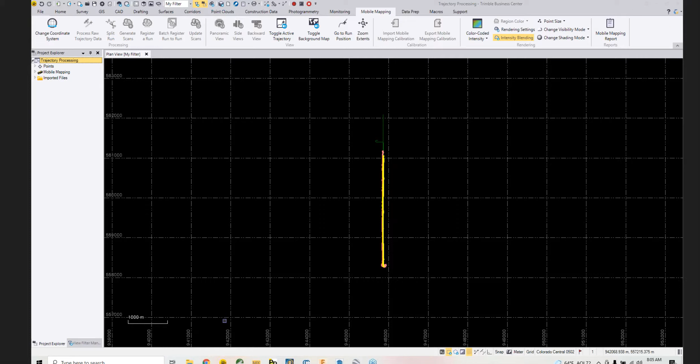So what you can see right here on my screen is just a standard plan view with my mobile mapping trajectory and my 2 runs highlighted. If any of you have used any Trimble mobile systems before, you know the MXDB is all I did. So at this point, all I've done is just drag this MXDB in and drop it there.

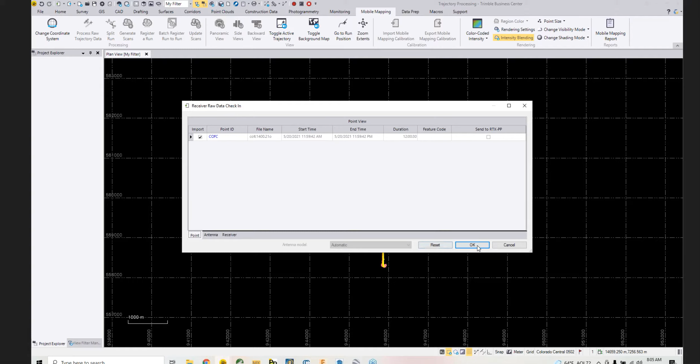The next step that we're going to do to highlight the new trajectory processing that's in TBC is bring in my base station. So I'm just going to bring in a base station, and you'll see the same screen that you would normally see when you have a base station in TBC. So let me turn on the background map. You can kind of see we're in Colorado.

This is during some of the testing pre-release of the MX50. I have a base station up here in Fort Collins, and then our collection was down here in Longmont. A little backstory on why I have a base station so far away is that was one part of the test that I was doing at the time.

And two, we had a couple CORS stations that were closer by, but they were actually recording at lower rates for the time period that we needed. One was, I think, at a 5-second rate, and one was at a 30-second rate, where COFC up here in Fort Collins was recording at a 1-second rate. It also included GPS, Galileo, GLONASS, and I think Beidou.

So it is a longer baseline than we would generally recommend for a mobile mapping job, but the bases that had a shorter baseline would be more detrimental by having those slower update rates. So short baselines are important, but 1-second update rates are more important. So that's why we use this base.

Knowing that these bases weren't recording ahead of time, if I did my due diligence, I probably should have set up a local base, but this was just kind of, we're mostly looking at horizontal accuracy on this one. GIS level accuracies were our goal. There's no control targets, so we didn't worry about it too much.

So you can see here's my mobile mapping run down here, and then our base station up here. All I did was drop them in, and then I'll move into the next step. We're always going to take this left to right workflow that I've kind of harped on, and if I've had demos with any of you, you've probably heard me say it before.

So while that's going for a few minutes, I'm going to just open this next project up. This is the same project - it's just been generated, so let me move over here.

So what I did after that was it automatically changes your primary trajectory to your SBET that you just generated. And then all I've done is generate scans. I wanted to open that up and discuss that for a second while we're waiting for the QC plots.

Generate scans is the same as you've seen with the MX9 if you're familiar with that system. Hit next - I wanted to stop and talk about filters for a second because we do have some different options for filters. We have fewer options under the advanced filtering settings, but we've spent quite a bit of time on the presets, so I wanted to discuss the 2 different presets.

The default preset uses the firmware flags that are filtered on the actual system during collection - things like high amplitude, isolated points, and points outside of its range.

All those are flagged during the collection. The default filter uses what flags the system did and then removes those on processing. So it adds zero time to the processing to use the default filters versus not filtering at all. It doesn't take any significant amount of time, and it takes care of the majority of situations, is kind of how I describe it. It works pretty good.

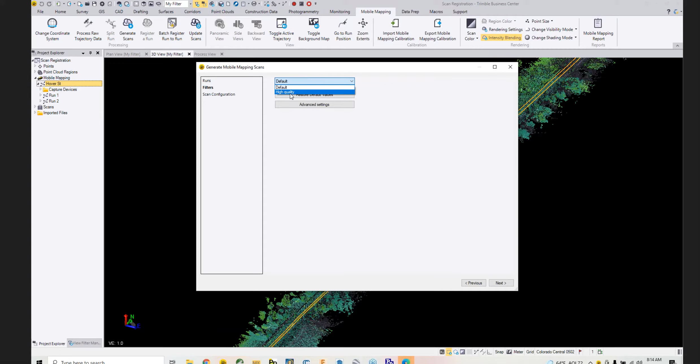So it's kind of a trade-off that we wanted to allow the user to select between where, hey, I don't mind if there's a little bit of noise or a handful of points removed that shouldn't have been. I just want to get my points ready. If you process in default, you should be able to generate scans in about half the collection time or a little bit more than that. So an hour collection is usually 30 to 40 minutes to process. High quality filtering will add some time to that if you have the time, but will give you a closer to finalized point cloud when you're done with it.

Then here, scan configuration is the same as any of the other mobile systems. You select your trajectory and can colorize and generate your masks here. We did do some improvements on the colorization accuracy for the MX50, which I'll discuss when I show the colorized point cloud.

I'm gonna open up the QC plot. I don't know if you guys saw the little notification, the GNSS processing finished while I was talking, and it generated the QC plots here, which if you're familiar with POSPac, you'll recognize that this is the same screen from POSPac. We took a poll of different people at Trimble and some customers. Everybody seemed to like the layout of these display plots that POSPac did. So we thought if it's not broke, we don't want to try to fix it. We're just going to move that over and allow you to use the same plots that everybody's familiar with.

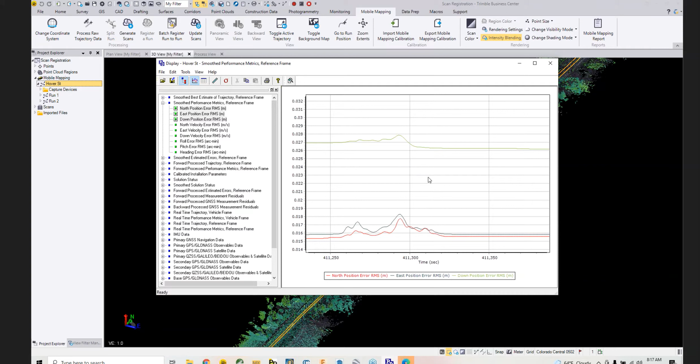One other little tip that I like to show is if you go to view, plot markers, in either event 1 or event 2, those will turn on markers at the camera trigger locations of the system. If I open that back up, you can see all these markers that show where you were actually collecting data. So you can focus on just the area of interest. You can see I drove for quite a while after, and you can see these spikes over here. If I had these spikes and I was worried about them, I could know that they're not important because they're not part of my actual collected run, as you can see over here.

And you have the same exact options. So if there's any other plots that you guys generally are looking at, you can check out your solution status, calibrated installation parameters for your DMI and GAMS lever arms, all those. There's a ton of plots in here that you can look at, and they're all the same as if you had processed in POSPAC instead of processing in TBC.

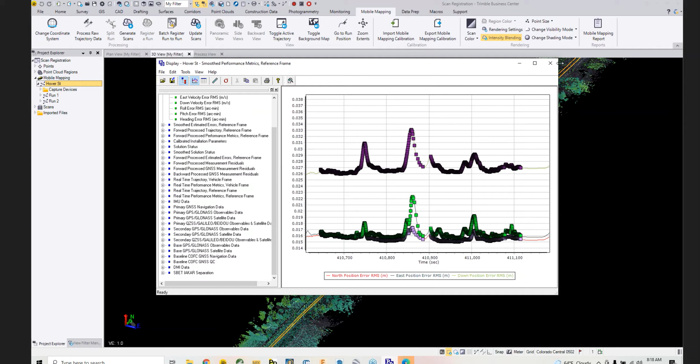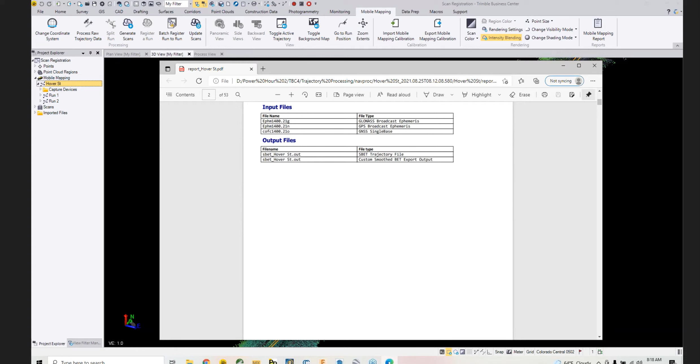Close that real quick. And then we also just at the same point generate the QC report in PDF format. So you can see, you have our ephemeris downloads, just a good summary of pretty much all. It has all the plots. Some people attach this to projects.

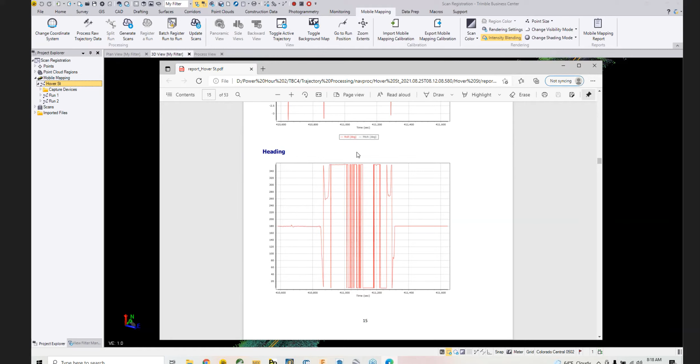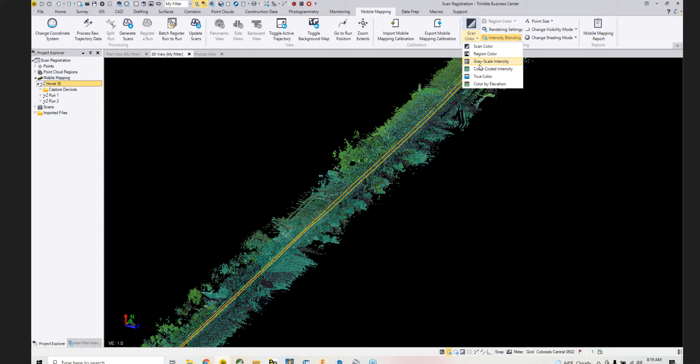Okay, so now that we talked about the trajectory processing QC, I'll kind of go back to the scan generation and this project that we're looking at here. So all I did on this one was a default filter with the firmware flags. It was just the regular SBET. It hasn't been registered or anything like that. Let's go to color coded so everybody can see.

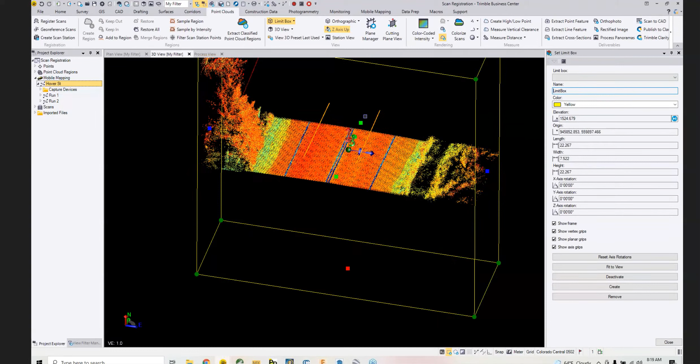And I wanted to kind of zoom in on a couple areas and just show you that there is separation, because the next step is to match these runs together. So let me go to point clouds, open up a quick limit box. So you can see there's our 2 passes. So at this point, if I go down the whole run, the separation kind of varies up and down. There's a few spots where it matches almost right on and then it gets out like this. But I just wanted to show this separation before I move into showing what we do about this separation.

Another point to kind of mention at this juncture is how clean this road surface is. That's one of the things we're really proud about with the MX50 is just the low range noise of the data and how clean, nice planar surfaces look. I'll show that a little bit more once I match these runs together, but just wanted to kind of give it a little highlight of the very thin range noise on the road surface with this system. Close this out.

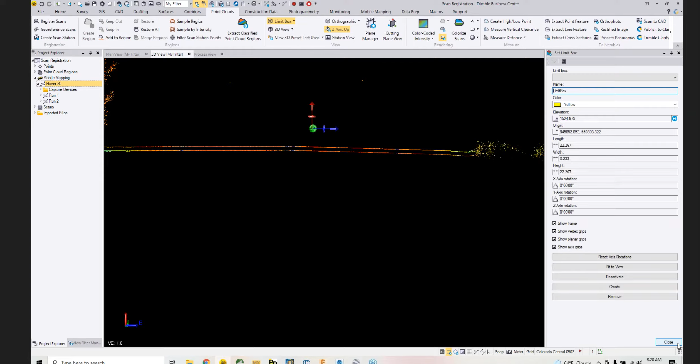Okay, so the next step in this process is to select my runs, and we did a batch register run to run. If we were registering down to ground control targets, which I showed in the last power hour, and I'm sure I'll show many more times in other demos, we would use the register run tool, which goes to GCPs. The run to run tool is what we're going to use for this type of job, where we're just mostly focused on matching the point clouds. We know their horizontal is within our expected tolerance for this job. We're just gonna do a quick match.

Your adjusted run and your reference run are right here. In this case, I only had 2 runs, so it's pretty simple. I'll just take my first run and adjust it to my second run. You just add it to the list. If I had more runs, I can add more to the list and it'll sequentially work its way down the list. So the order of that list is kind of important because if you move a run and then register another run to that one, the order of operations matters.

You can update the scans in a single click and open cutting plane view, or you can compute it, see what your values are, and then update scans after. Generally, I'll just update scans right at the same time, but I expected this one to work pretty well. It has good overlap. So what I did in this case is I computed it, made sure that everything looked as good as I expected, and then I'll close this out. What I did there was just save an extra step.

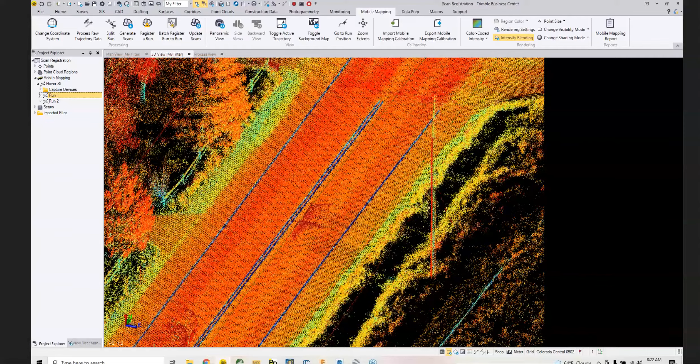There we go. I went into update scans manually and then colorized at that point. So that way I was kind of updating my scans to their final positions and colorizing instead of having to do 2 separate steps. So that's one reason where you would leave the update scans checkbox off in the register run to run tool. If you weren't going to colorize, I would just let it do it in one step. But that is kind of a benefit of doing it separately, is you can knock out the colorization at the same time.

Okay, now I'm just going to switch a few things around for 1 second.

Just getting another project opened showing the results of that batch register run to run. One thing you can note here on the top toolbar is, since it is MX50 data, the side camera view and the backward camera view are grayed out because the MX50 does not include those additional cameras.

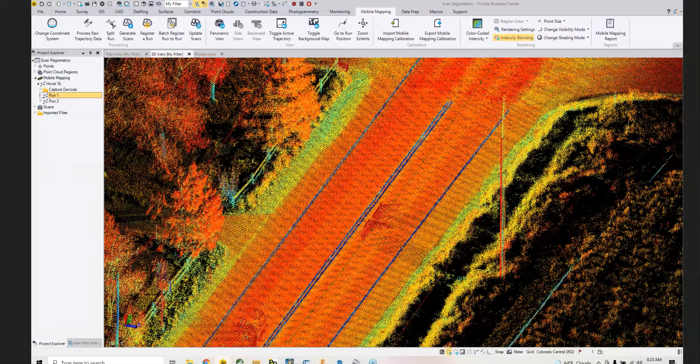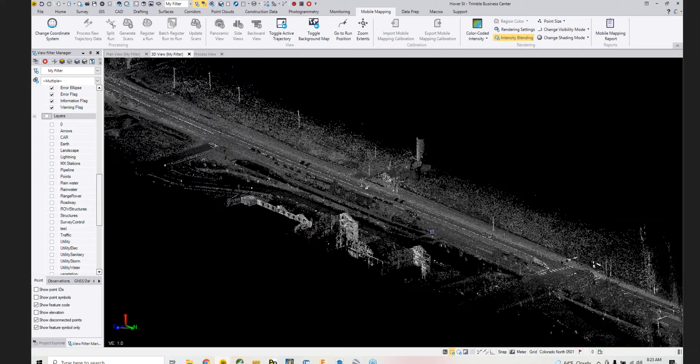Okay, now I have another project open. Let me turn on all the point clouds. Let's turn off all the extra features. So you can see here, this is the result of that run-to-run registration I just did.

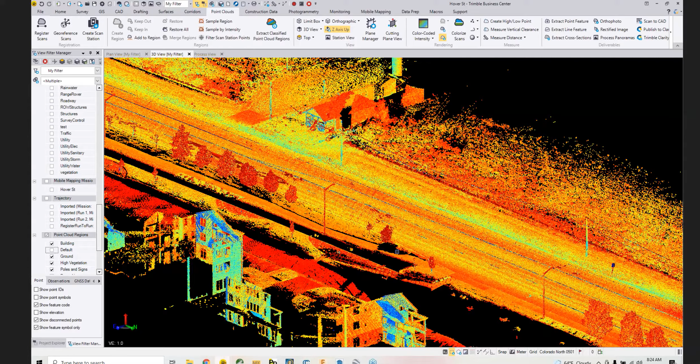I'm gonna turn off my default class because I did run an extract classified point cloud regions command to just get some of the vehicles, get some of the extra kind of trash out. I just let it do a quick one, didn't really clean it up any, and just use that as kind of my basis. So my favorite part about that is turning off everything and just doing ground. I like just a nice clean ground surface a lot of times when I'm working.

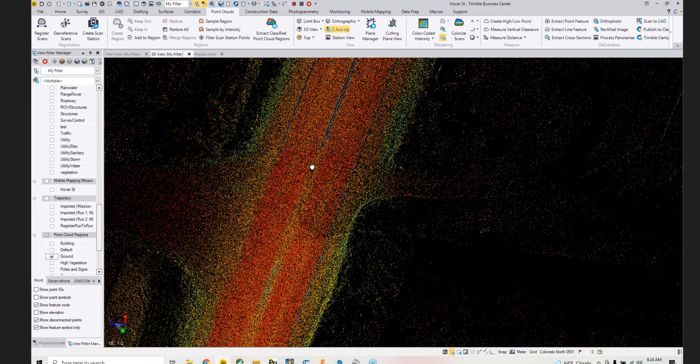And we'll just zoom in on, I don't know, some random spot here in the middle. That might have been the same intersection I was looking at before. Let's get a nice cross section of that road. Okay, so you can see the nice clean road surface here.

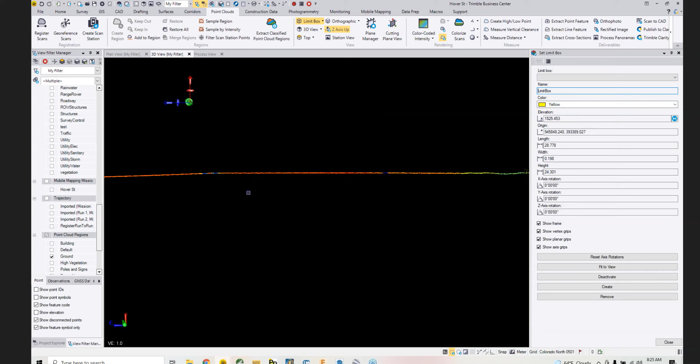And I did show the separation from before. I just kind of want to highlight that there's still multiple runs there. So you can see if I turn off both, there's one scan, there's the next scan, there's the rest of them. And this was fully automated, just let it run down the roadway.

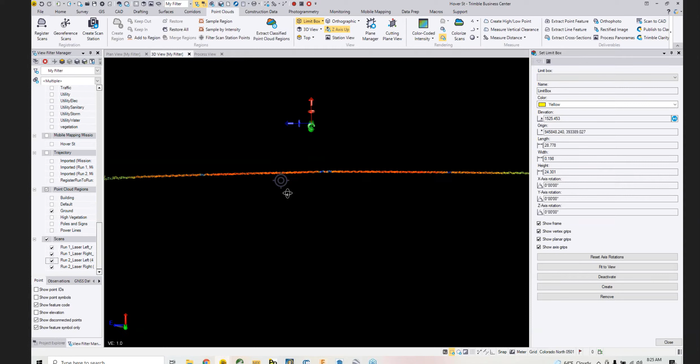And like I said, this is a pretty typical, easy kind of job for the run-to-run tool because you can see how much overlap there is. There's almost the entire roadway of overlap. So this is where we would expect it to work very well, and I just kind of want to highlight how that tool matches everything up.

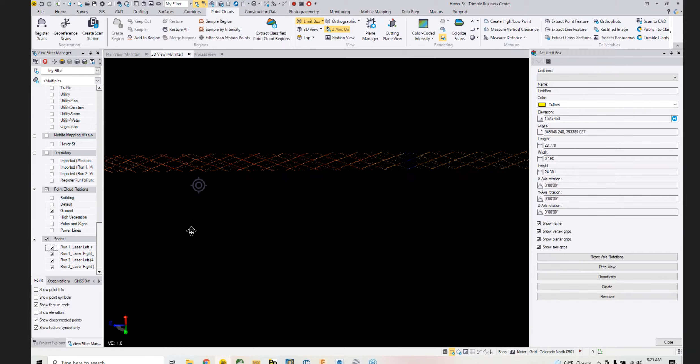A couple more things to kind of note. I want to talk a little bit about the MX50 data itself. One of my favorite things about it is how clean the intensity returns are. You can see, we have really nice bright road striping with clearly defined edges.

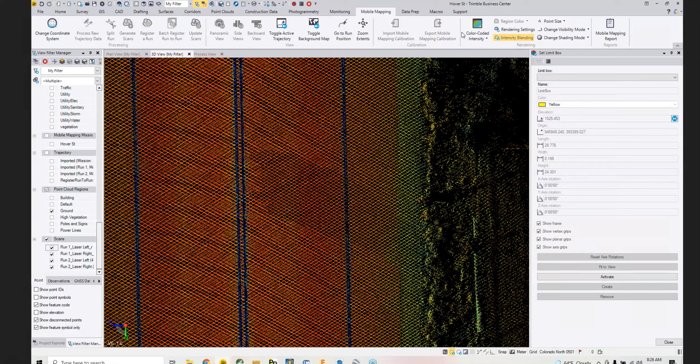And one of the improvements that we made with the MX50 is we increased the accuracy of the colorization of the point cloud. So we actually reduce the range that the images can be used in to try to keep a higher accuracy, so that when you're using the actual true color scans, there's more trust in actually where that color is. Where some colorization in different softwares I've seen, it's nice for visuals, but I wouldn't pick a target based off of it.

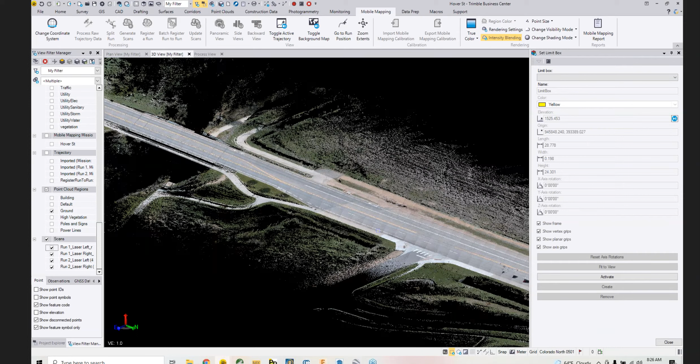We've done quite a bit of work to get these colors to match up with the intensity values as closely as possible. Do a little bit of zooming out so you can see the coloring. And you still have this where somebody gets behind you and you get a little bit of car color on the road surface.

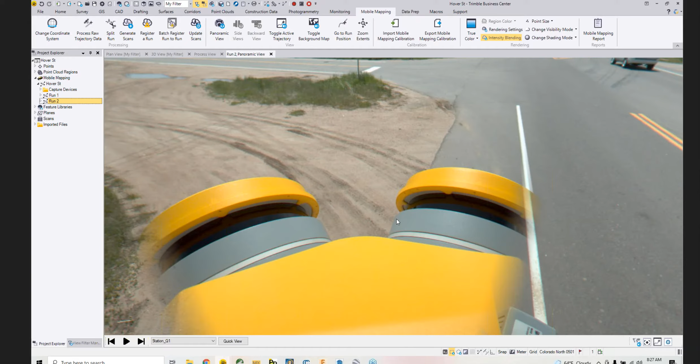Okay. One of the next things I wanted to show real quick was just to open up a run and do the panoramic view. It's the same Ladybug 5 Plus that's on the MX9, so image quality is the same. One of the nice benefits of the 50 is you actually get a little bit better view of the roadway next to the vehicle depending on mounting position, because the MX50 is a little bit smaller of a package, so you do get a little bit better of a downward facing view.

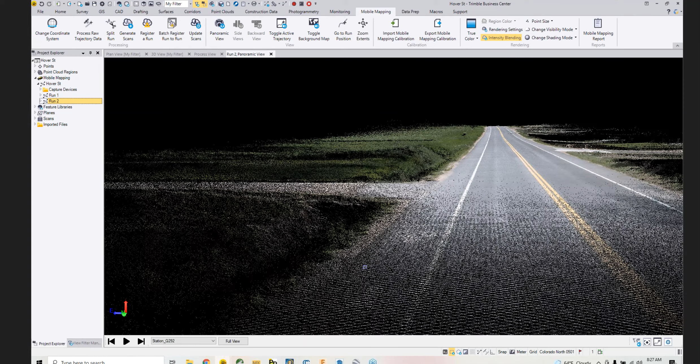Can do all the same stuff here with turning on point clouds and viewing the point cloud from the actual vehicle point of view. We'll jump to just the middle of the run. You can do all your normal tools here. Some people prefer working from these views. So I can run extractions here, mark up the roadway, anything that you would normally be doing can be done from this view. Personally, I work more in the 3D view than from the actual vehicle-based view.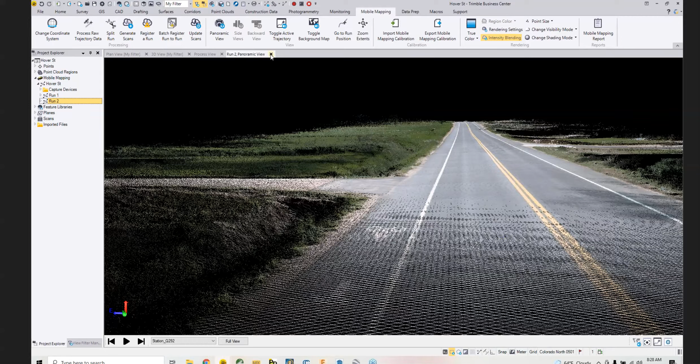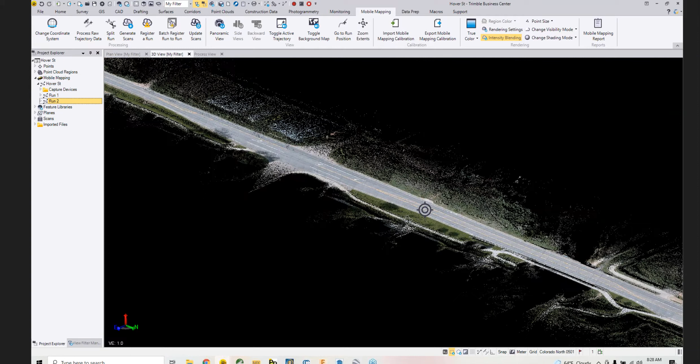Okay, so as far as mobile mapping specific stuff goes, that's kind of where this presentation ends a little bit. The rest of the tools in this toolbar, visualization and reporting and things like that, we're not going to dive too much into. The idea of this project was to focus on getting assets out to a GIS software of some sort, doing something like, let's say, a city government was collecting all their signs in a certain area or wanting to inventory their poles. That was kind of the idea of test collecting this data, processing it, going through this whole process.

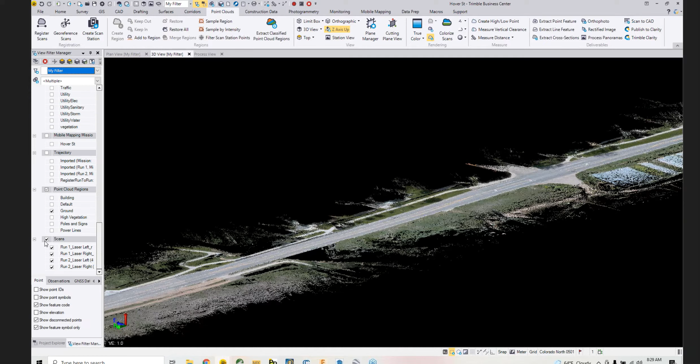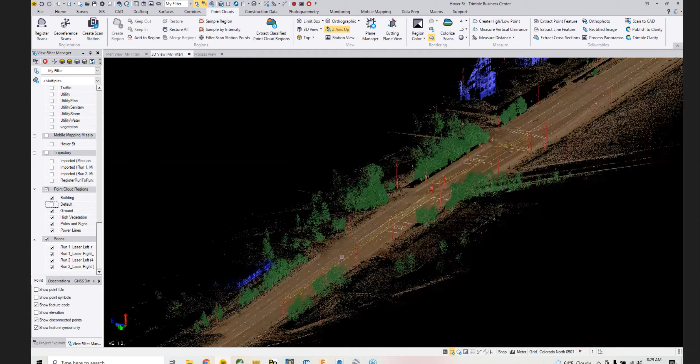So at this point, I'm going to move into the point cloud module and change a few things around. Let me turn on my other regions. So for this project, I did a quick extraction of the signs, the poles, and did some curb and gutter work on this one. And then that was kind of our theoretical test project. There's a lot of power poles on this project, and then also a bunch of these light poles right here. And we coded them all as such.

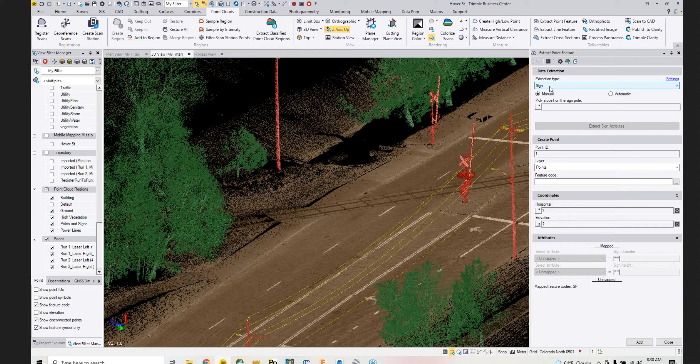Signs and poles, we're all using this extract point feature tool. I'll kind of discuss it for a second, but I'm not going to run it. It's been around for a bit. We've made some improvements, but it's generally been the same for a good bit, so many of you are probably familiar with it. I did want to discuss a couple things though with sign and pole and tree extraction. There is a little bit of a tip and trick that I was going to pass along: if you leave all of your regions on, it's going to search through all of your regions.

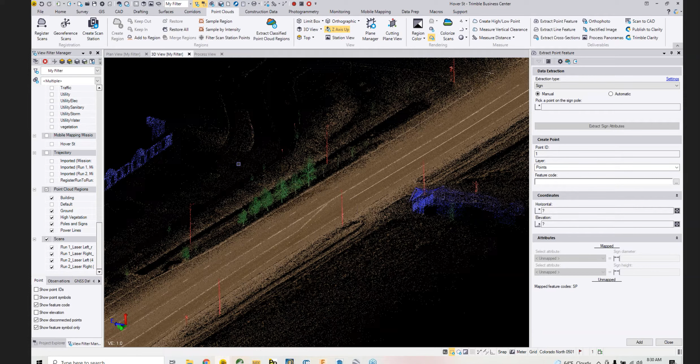So in a case like this where I didn't do any manual cleanup, you can see there's some buildings over here that have a little bit of pole class on them, things like that. I didn't do any cleanup here, so I wanted to run the tool on everything. So if there was a sign that was misclassified as a tree, I still wanted to pick it up. If you had done a lot of cleanup and knew that all of your poles and signs were in your pole and sign class, you can turn off these regions, and then the tool will only run on the visible region of poles and signs, and it'll run multitudes faster because it's going through many less points. But if you had a pole or sign that wasn't in that particular region, then you might have to worry about that.

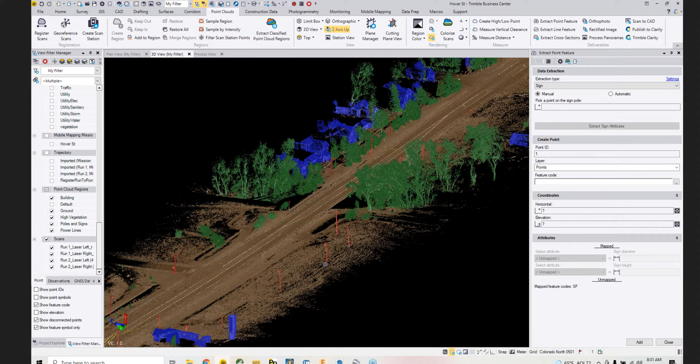One of the other things that it will use is the ground class. So if I'm doing a pole or a sign extraction automatically, the ground class is used to help set a base height for the extracted point. So let's say that sign right there, if it didn't have any returns, or if this pole didn't have any returns on the bottom of the pole, or was light on the bottom of the pole, it uses the ground class to help set kind of a floor to get a better elevation for that pole height.

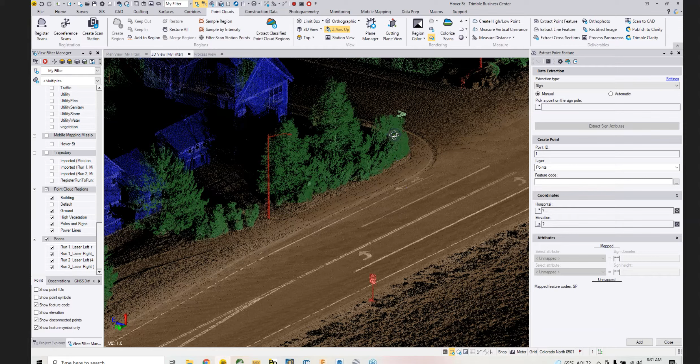So that's something that some people weren't aware of, that the sign and pole tools work on all the regions, and depending on how you turn regions on and off, it can kind of change how the tool works, both in speed and if you're missing things like this sign over here that got thrown into the tree class because it's kind of bunched up with this vegetation. Okay, so I'll close that tool out.

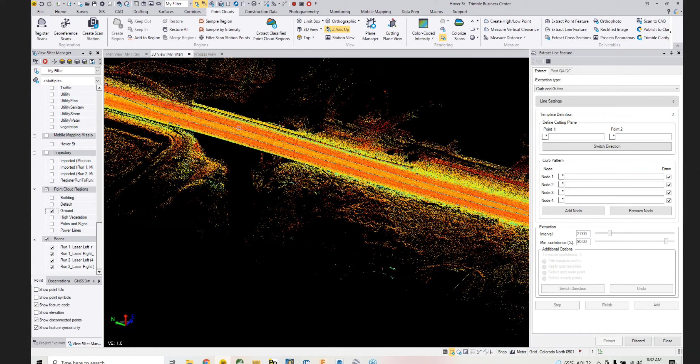Wanted to turn on the extract line feature tool real quick. Turn on just my ground. And this one, since it's a newer tool, I'll do a quick run of it. Yeah, let's try it over in this section. So many of you might have seen this in different webinars so far. The way the curb and gutter tool works is you can set your line settings. So I might just call that CG. Let's call my layer utility storm, and then you can set your color to however you want it.

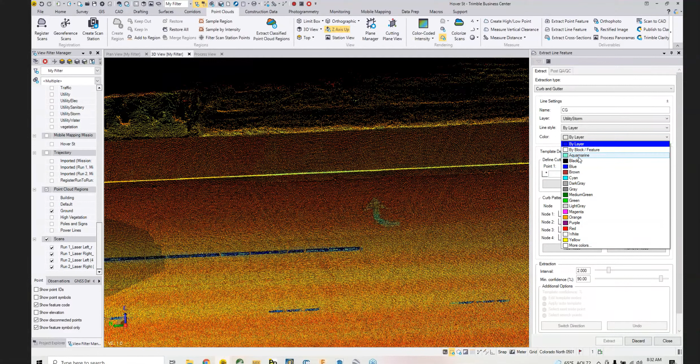I actually individually color like top of curb, back of curb, different things. So I'm not going to mess with the coloring right here. You set 2 points as kind of a cross-section view, which I'll do like that. You can zoom in. I'll turn the point size up a hair. Then we're going to set our different nodes. My back, top, bottom. And then sometimes the edge of the gutter is a little hard to see. So one thing I like to show people is you can actually select it in this other view. So in this top view, not sure how it's showing up for everybody on the webinar, but I can actually see that gutter line a little bit more clearly over here.

So I'm going to select it from that screen, and you can see it updates down to this bottom cross-section screen too. Yeah, you can see it, Skylar. And then also, the nice thing too is you can see all of those 4 picks in the 3D view if you zoom in, so you can validate it there as well. Yep, you can see the little magenta dots right here, and I can kind of turn the angle and make sure everything's lining up correctly.

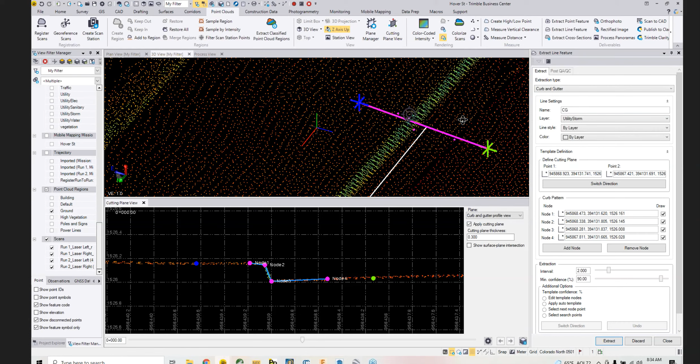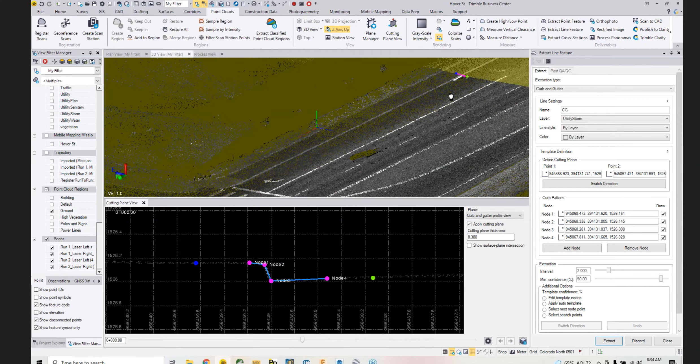And then you set your interval, your kind of spacing that we're going to be setting, or I kind of think of it as like a chord length of these lines that we're generating. You set a confidence interval where it's going to stop at and have you revise it. And then once it stops, I'll show a couple of these additional tools. I'm going to switch this over to gray so everybody can see it a little bit better. And we'll just run the tool down here to the edge.

So it felt that it was outside of the confidence interval. I'll switch back over to color so you guys can see why. You can see this kind of top of curb is falling off of my template a little bit. So I'm going to go in, it automatically selects edit template nodes. You can see our confidence interval dropped down to 86%, which is why it dropped off.

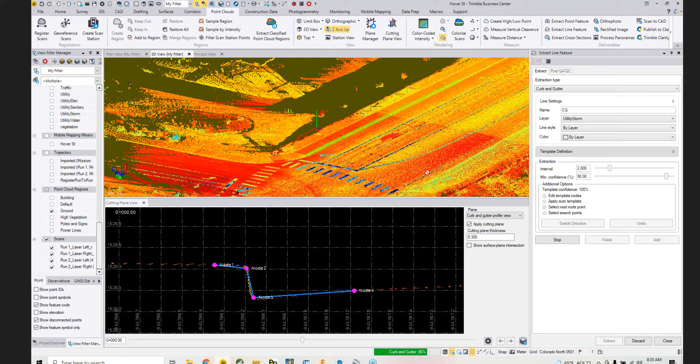I'm gonna take that node, pull it out a little bit. I'm gonna adjust this up just a hair, and then I think I like the rest of it. So it looks like the curb became a little bit more vertical, which is what happened. And then I'm gonna say extract, and we'll continue on. Okay, and you can see right here, this is where I was trying to get it to, where you can see the curb drops down for this crossing right here.

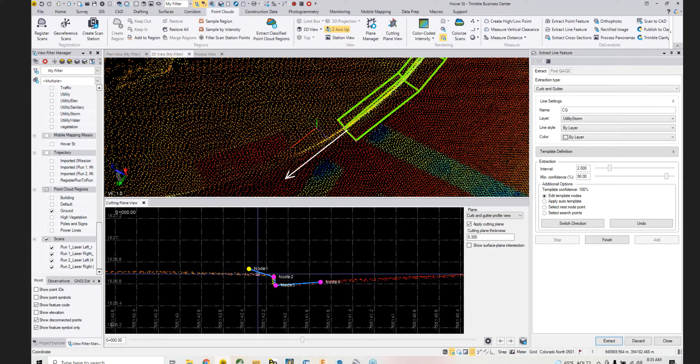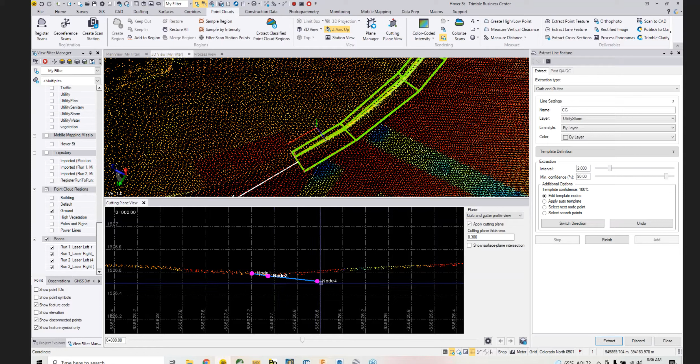So I'm going to edit my template nodes to fit this kind of curved, dropped down curb like that. I'm going to select my next node point, which is referencing node 2, which is this one right here. I want to select right where it kind of becomes flat. I like to use the edge of that, I don't know exactly what the terminology of that ramp would be, that dark ramp. I select right at the edge of that ramp, say extract, go in, edit, make everything flat right there because we no longer have a curb.

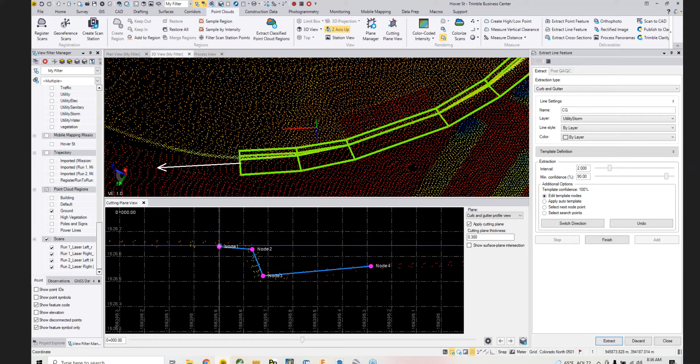I'll select my next point, go to the other side of that ramp, extract. Then I'm going to select up the curb a little bit, extract, edit to fit there. And select next, and you just kind of manually do the tapering, let everything change around, edit that. And then once I reach the full height of the curb again, and we're kind of out of this turn, which might be right there. I think we're back to about the full height of the curb. I can just hit extract again and let it start doing its own automatic.

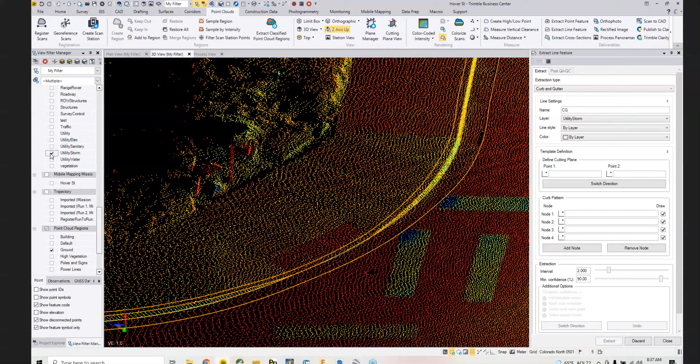And so let's finish that. I just want to show the QC tool real quick. I like to do a smooth curve on most everything. It seems to fit quite well, so I apply it all and then add. Let me turn on that curb and gutter. So you can see I actually already had curb and gutter lines there because there's additional ones hidden right behind.

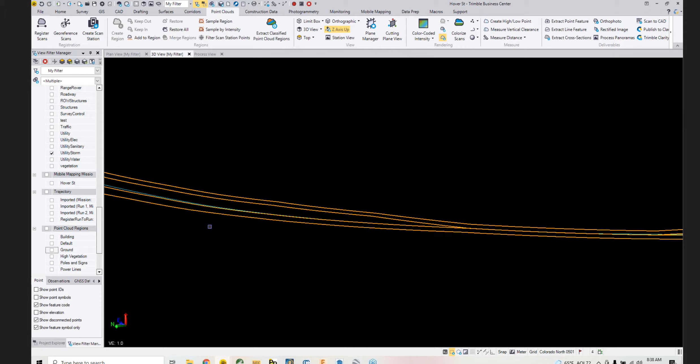But I like to show this where when everything's kind of nice and straight, we just let the tool do its thing. But there's all these handy kind of manual tools to help it with weird things like these ramps right here, where you have a nice smooth transition down to flat and then back up to your regular curb. So I'll close that. I'm just gonna kill those because I still have my original stuff.

And then at this point, I want to show all of the different features that I've extracted real quick. Okay, so you can see I have all my signs, which I'll turn on some scan data so we can see it.

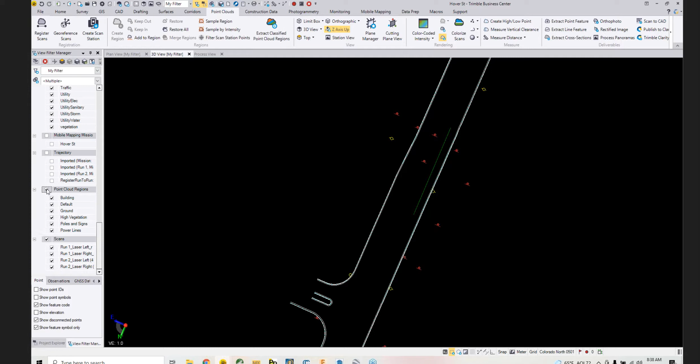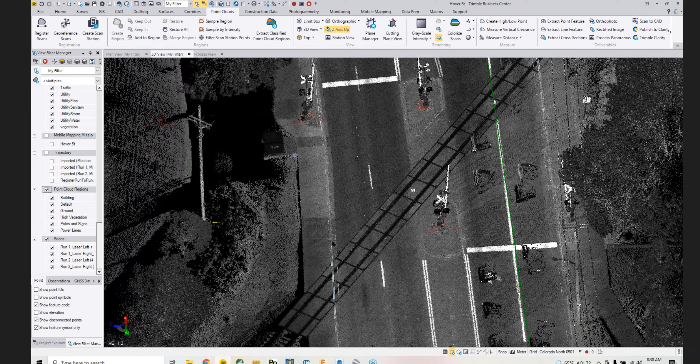So you can see my railroad crossing signs, power poles, more railroad crossing signs, more power poles - there's a couple hundred features in here that were extracted.

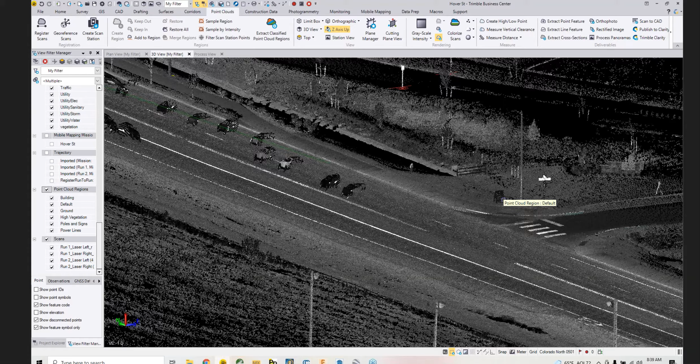At this point, in this theoretical job, I'm handing this off to whether it's a GIS department or a colleague - or maybe I still handle GIS stuff - but this is kind of the transition point. We have all these features, all my curb and gutter and flow lines extracted, plus all these other features. So I'll pull up a little section on the GIS module and hand it off to Jeff and Nicole, who in this theoretical case are the GIS department I'd be passing off to.

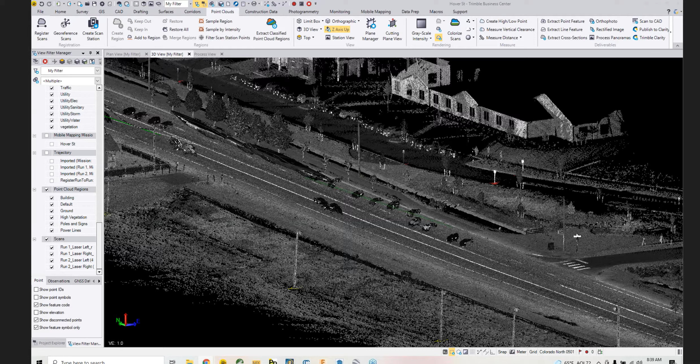So next up, I want to quickly highlight what's changed in the GIS module the past couple releases, dating back to version 550 earlier in the year. We really needed to give some attention to this module - we wanted a streamlined approach to send data to and from. Also, if you follow Esri at all, you're aware they're trying to move away from ArcMap and towards ArcPro workflows. So in the past we just had a general connection to ArcMap, and in 550 we made a connection to ArcPro, which is really nice.

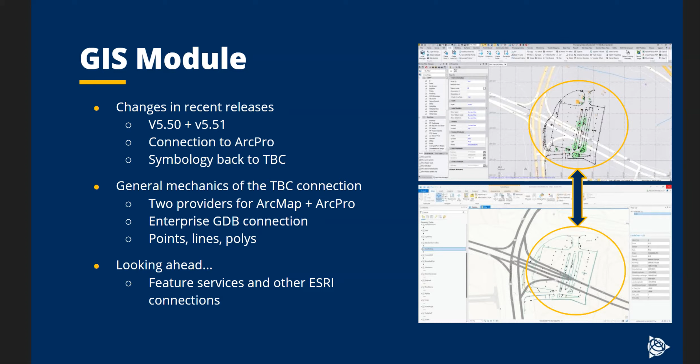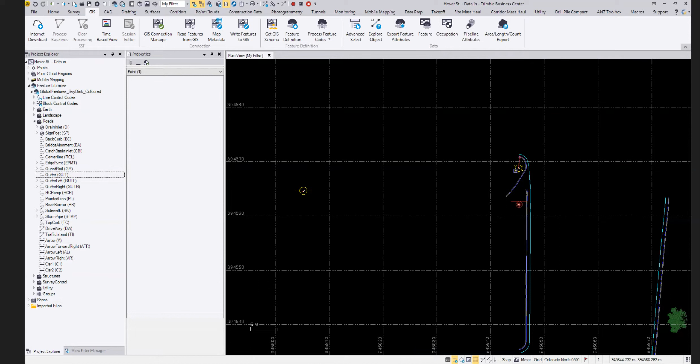So here I have the same TBC project open on my end, and I've turned off the ground scan so the points and line work are a bit easier to see. I've also imported an FXL so the points and line work have some symbology retained. If I zoom in, you'll see the power poles are these yellow lines here. If I select the point in the properties pane, you can see the feature code, the layer name, and the height and diameter, which are its feature attributes. Same with this little sun symbol - this is a light pole, and you also see height and diameter under feature attributes. For signposts, you can also see height and diameter, and these ones actually have a sign type.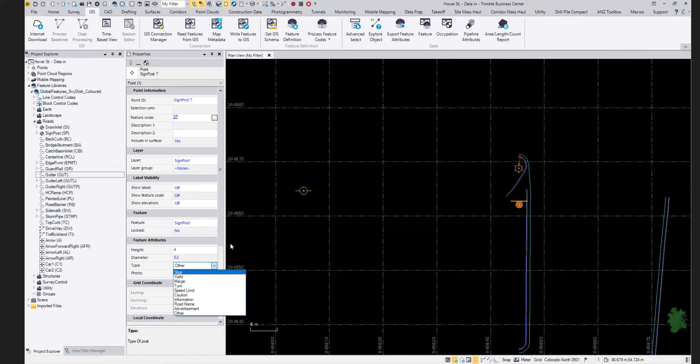Currently all of the signs are set to other, but I want to show that reading and writing data between TBC and ArcGIS Pro actually retains these attributes. So for the sake of this demo, let's go to this top signpost here and change the sign type to a stop sign, and just for good measure, let's change the second signpost down here to a yield sign.

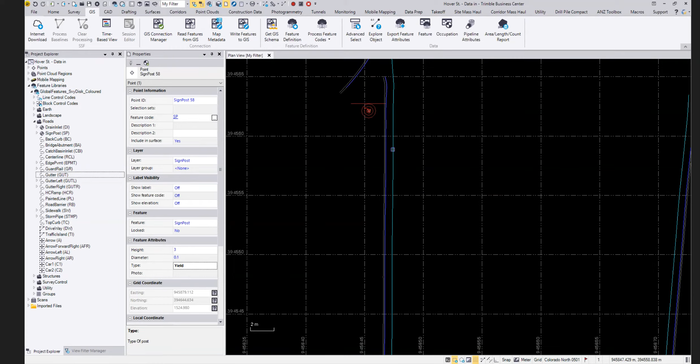So now that we've done that, let's zoom out a bit and go back down to the line work that Skylar just extracted. You'll see that there are 4 lines here: top and back curb, which I've had in gray—you can see the feature in the properties as well as back curb. You might not be able to see it, but the flow line is here in dark blue, and this nice cyan line is the gutter.

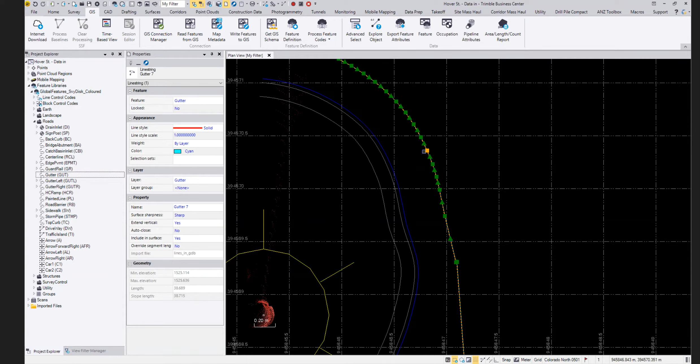So now that we've gone over that, let's get straight into reading and writing data between ArcGIS Pro and TBC.

So what I want to do first is go to the Home tab up here and open the export command. This will open up on the right side for me, and I want to select the GIS tab. Before moving on, I do want to say that you can just export your data as a file geodatabase right off the bat, read that into ArcGIS Pro, and play around with that. But for the sake of this demo, I want to show the reading and writing of data using these GIS commands here in the GIS Ribbon: read features from GIS and write features to GIS.

So I actually want to just import a schema into my geodatabase for now. This will be able to show the linking of data and avoid duplicate data, which we'll see a bit later. That being said, I'll select Geodatabase XML Exporter first.

I'll select all of my data, and I'll choose a place to save this to. So I do have a folder called TBC Exports, and let's rename this to TBC_XML. I'll hit export at the bottom now, and as you can see, that was really fast.

So I'm going to quickly switch to ArcGIS Pro now. Here I have an empty project, and if you look at the catalog pane on the right here, you'll see that there was actually a database already created with the same name as my project. ArcGIS Pro does that automatically, so I'll be using this file geodatabase.

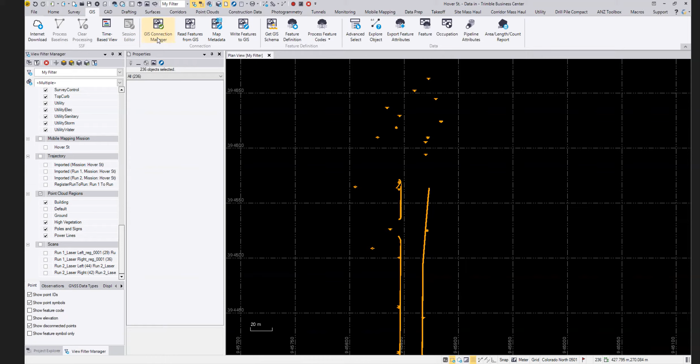So going back to TBC now, I want to go to the GIS tab up here and select GIS Connection Manager under the Connection tab. This will open up the GIS Connection Manager on the side here, and you'll notice that I already have two connections. This was just to read in the line work and points that Skylar just extracted.

So I'll create a new connection, and let's call this ArcPro_gdb, just so I can keep track of where I want to write this data out to. Under the data source type, you'll see Shapefile, File Geodatabase, and Enterprise Geodatabase. Jeff mentioned earlier that the Enterprise Geodatabase might be the more sought after option in terms of GIS connection. These are good for larger organizations who want to share data more freely or collaborate on a geodatabase with more ease. So if that's what you're interested in, definitely look into this. But for the sake of the demo, I'm still using a file geodatabase.

I'll select Connect, and I'll go to where I've saved that ArcGIS Pro project. So, MX50 Demo - New, and then here is my GDB. I'll select this folder.

Hit OK, and then I can go straight into writing features to GIS. Notice I just clicked on an icon in this tab within the command. If you hover over the icons, you can see what command that is. So this is read features from GIS. You can also access the same commands in the GIS ribbon at the top here. This is where write features to GIS would be.

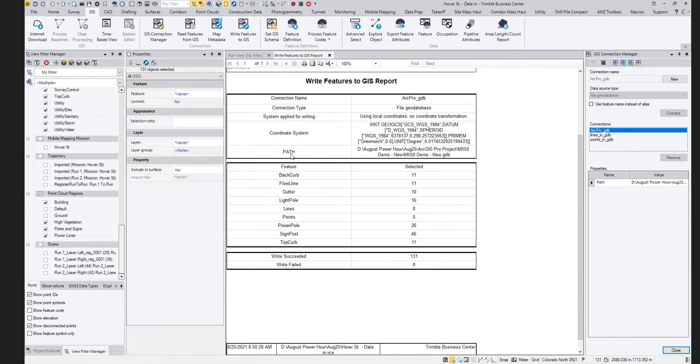I'll say yes, and this report just basically goes over what features were written out, how many objects of those features were written out, and if anything failed, you'll see which features failed. It'll also show you your coordinate system, and scrolling down a bit, you'll see the different feature types here, how many objects were selected and written out. At the bottom, you can see write succeeded, 131 objects, write failed, 0. So it looks like everything worked nicely, and that's great.

I'll close this report out now and switch back to ArcGIS Pro. Here, I'll just refresh my GDB and select all of my features, excluding points and lines like I mentioned before, right click and hit add to current map.

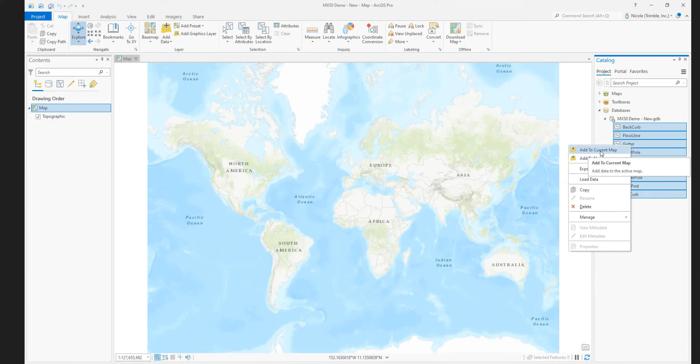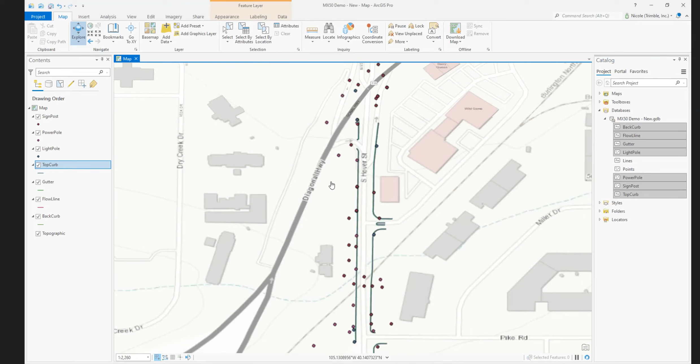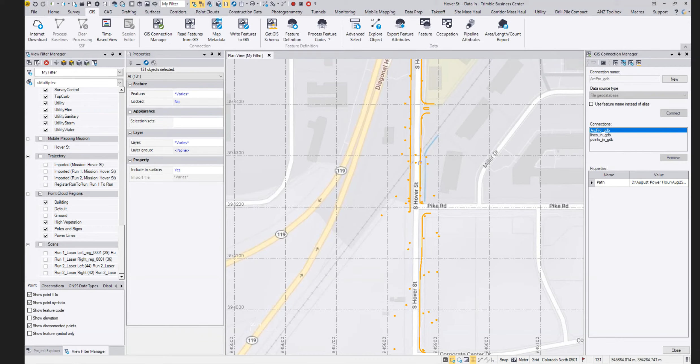As you can see, the data is still coming in, but we are along Hover Street. If you go back to TBC, that should be where we are at as well. So that means that the data came in at the right spot, which is nice. Zooming in, you see Hover Street as well and Pike Road. So it looks like it's in the right spot.

Now, if you recall, we changed the signpost types for these top 2 points up here, so I'll just check the attributes. It'll open up this pop-up pane. You see that the signpost feature was retained, the height and diameter attributes are also retained, and the stop sign type is here as well. For good measure, I'll check the second point here that we changed, which should be yield, and we see the same thing here as well.

Now that we've done that, let's write out the rest of those points from TBC. As you can see at the bottom, I have this empty space here. Let's write out the rest of these points. So again, I'll go to the write features to GIS command up here. You can also access that through the little ribbon in the command. I want to make sure I have the same connection selected, which is still ArcPro.

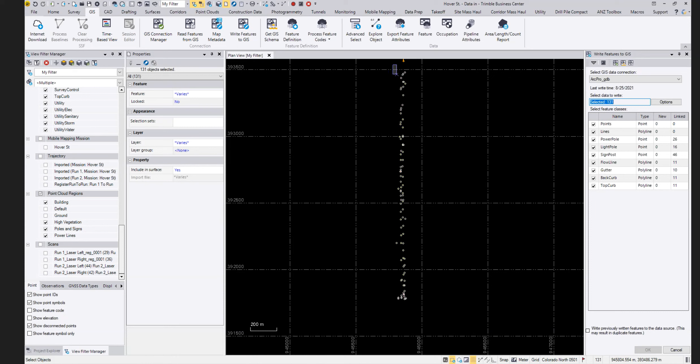That's nice. Under select data to write out, I could either select all of this data that I know is new, which you'll see here under the new column. However, if I select all of the data in my project, you'll see we have still the new objects, but also the linked objects as well. This is nice because it avoids duplicate data in the GDB.

That being said, I'll hit OK and have this write out to that ArcPro GDB database. It'll ask me if I want... Oh, yeah, go ahead. Here, Nicole, once you set up that schema like you did the first time, you're ready to go and you're connected, right? You can write these features without having to do that schema again. For sure, it's just a one-time thing.

Perfect. Thanks, Jeff. So I'll say no to opening the report again because we've already seen it earlier. And if I go back to ArcGIS Pro and give this GDB a refresh, we should be able to see the points come in. Oh, there we go. Might be a little bit glitchy, so I'll just turn on and off these layers. And there we go. So everything's in here now.

Again, you can look at these points as well, and they will retain the height, diameter, and for signposts, they'll have a type as well. Like I mentioned before, all the signposts are set to other, so that looks good to me.

So now that we've seen the writing of data from TBC to ArcGIS Pro, let's show the reading of data into TBC. So what I'll do is create some line work in ArcGIS Pro and read that into TBC. I'll do that by going to the Edit tab up here. I do have snapping on, and I'll hit Create Feature.

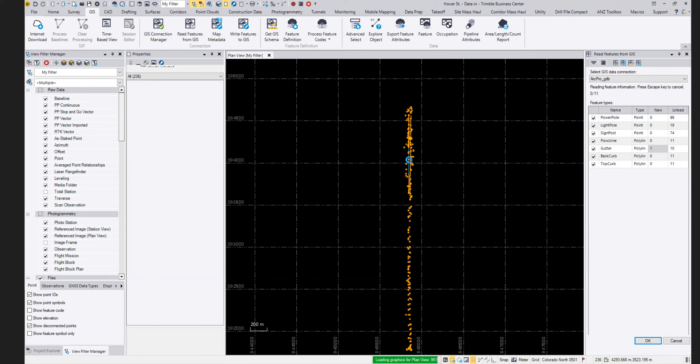I'll hit OK. I do have everything selected right now, so it's all orange, but we briefly saw that little cyan line. I'll zoom back in. And you'll see that we have that gutter line connecting the previous gutter line and this other gutter line here, and it comes in as cyan as well. If I select this feature, you'll see in the properties that it is feature coded as gutter as well, and that's why it is colored appropriately. So that looks great. I'll go back to ArcGIS Pro now.

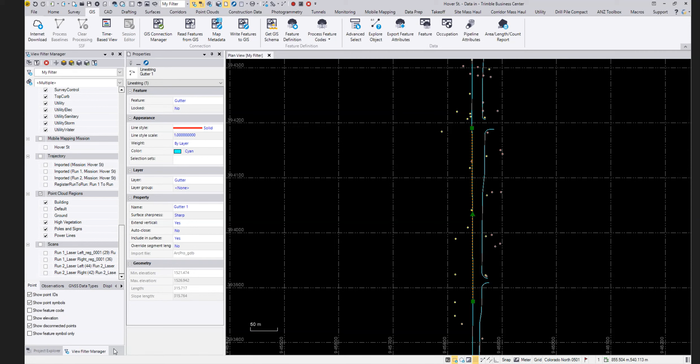And let's say, for example, you want to change the symbology in ArcGIS Pro because currently everything is just a point with color. It's a bit hard to tell what's what without clicking on it. You can definitely do that by selecting the symbol here in the contents pane. That'll open up the symbology command, and it'll give you the option to change that up.

I've actually done this prior to the demo just to save on time, so I'll pull this over here. You can see that I changed signposts to these red diamonds, power poles are these brown circles, and light posts are these orange hollow circles. Again, these have their attributes retained, so I'll check that stop sign. You see the same thing, so that looks good.

Now, one thing that you can do with this data is to give it to a client or share it with a colleague as a deliverable. You can do this by going to the Share tab at the top here in ArcGIS Pro and selecting Share as Web Map. That will open this command on the side as well, and it'll give you the option to edit your map details. So you can enter in a name, a summary, some tags to make it easier to find.

For this demo, I want to copy all of my data over. And you can share this with the public, within your organization, or just with yourself, which is not checking any of these.

Then you would hit Analyze to see if there are any issues with posting the map first, and then hit Share once you're done with that. I've actually done that prior to this demo, so I do have that ready. Let me just go to my contents page in the ArcGIS website. So I called this map MX50 data-demo.

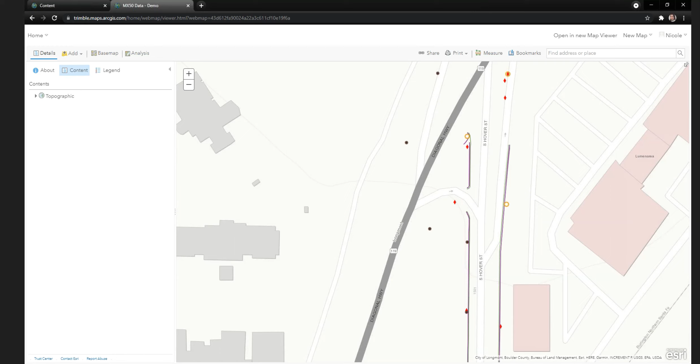Everything looks good to me, so I'll go ahead and open this in the classic map viewer. And this will retain the symbology from ArcGIS Pro, and it'll also retain, again, the feature attributes from TBC. So let's go to our trusty little signpost at the top here. You can again see the height, the diameter, and the type of sign, which is stop. And again, for good measure, we'll check that second one, which is yield, and we see the same thing.

I think that concludes my part of the demo. I'll pass this back to Jeff now. Awesome job, Nicole. Thank you. Mm-hmm. Let me share mine. And give me a confirmation once you see my screen. Good now. Okay, cool.